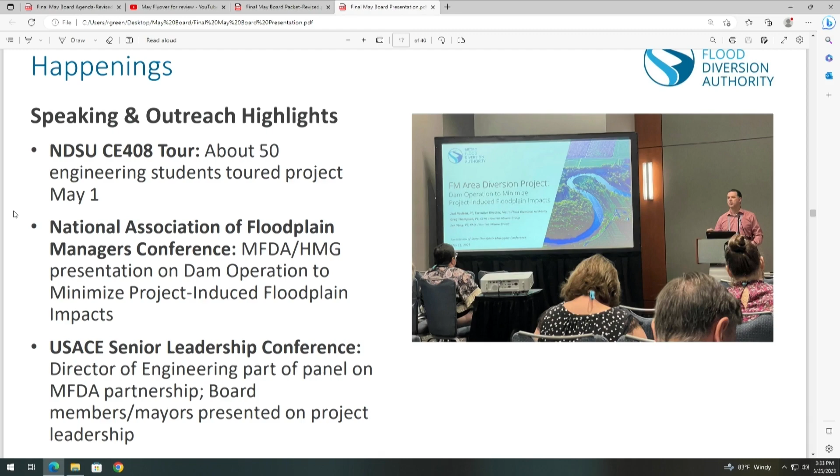Any questions? We know the Corps event went very well. They were very pleased with the project and seemed to hope other places in the country could work so well together. Yeah, and Mayor, I do know a number of other non-federal sponsors came and presented on certain aspects as well, and they got exposure to our project too. So it was great to see the exposure, and hopefully some best management practices from what we've done here can be conveyed to those programs as well.

Is that all you have today? That's all I have for you. Come on, Joel, it's usually 3 slides. That's all I have. We'll have more at the end, pertinent to more technical issues.

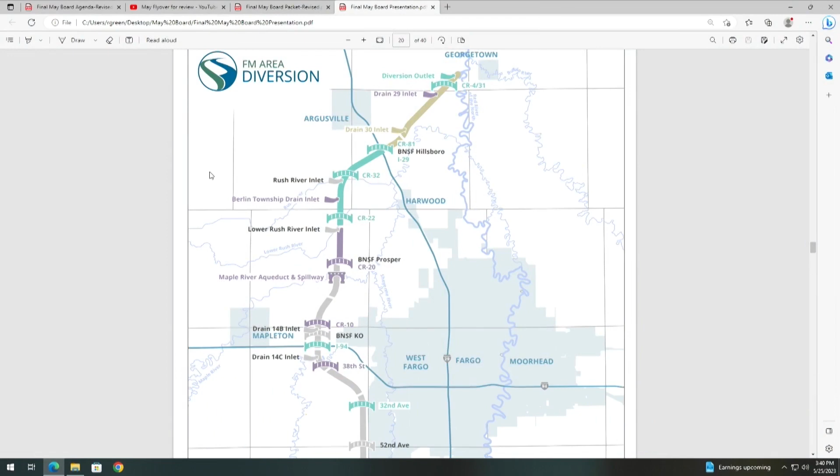We'll move into the stormwater diversion channel associated infrastructure project. We have our map this month, and I'll start with the design progress update. We've surpassed 1,200 review cycles for the P3 portions of the project. We have 77 approved designs, 58 utilities, 19 others, and 63 submittals currently in review.

As far as construction is concerned, channel Reach 3, just west of Interstate 29 up north, has resumed - that's pictured in our drone view. West from there and south, turning the corner, we've got Reach 4 and 5 starting in the next 30 and 60 days respectively.

Bridge crossings, highlighted in our video, both County Road 81 and 32 are just underway, with bypass construction at County Road 81 and preparation for surcharge embankments and wick drains at County Road 32. Just this week, not pictured in our video, the I-29 bypass has also started.

Drain inlets are just starting at Drain 30 as well. The diversion outlet and Drain 29 are kind of connected in terms of schedule sequence and logic - Drain 29 parallels the last mile or so of the channel. Those will be starting in the next 30 to 60 days.

Last item of note, Maple River Aqueduct, in the next 30 to 60 days will see actual construction of permanent features. Excavation will be the first thing they do there, but we are just starting to build access improvements to that site. It's a little remote - right north of West Fargo and west from there, there's about 2 miles of existing township roads, and the last mile is on the channel alignment to access that site. Those improvements are happening now as well.

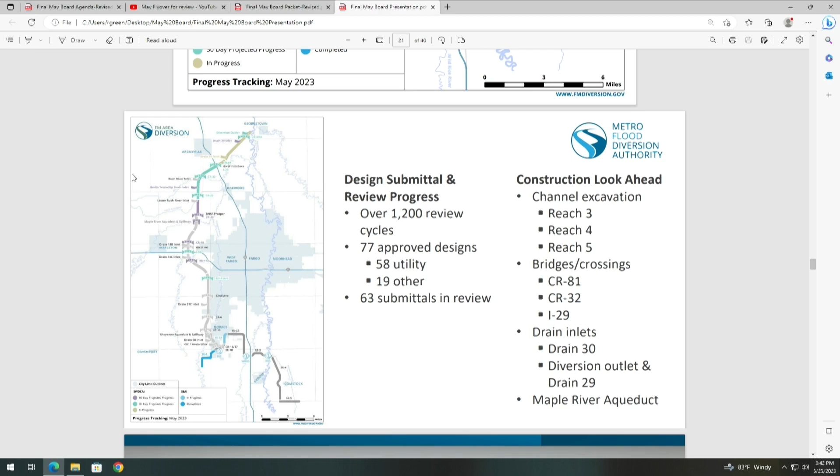I will stand for any questions on the P3 project. Any questions, group? Okay.

The pace of construction on the FM area diversion ramped up this past month. I'm Tom Fuchs, Senior Construction Manager for the Metro Flood Diversion Authority, with your progress updates.

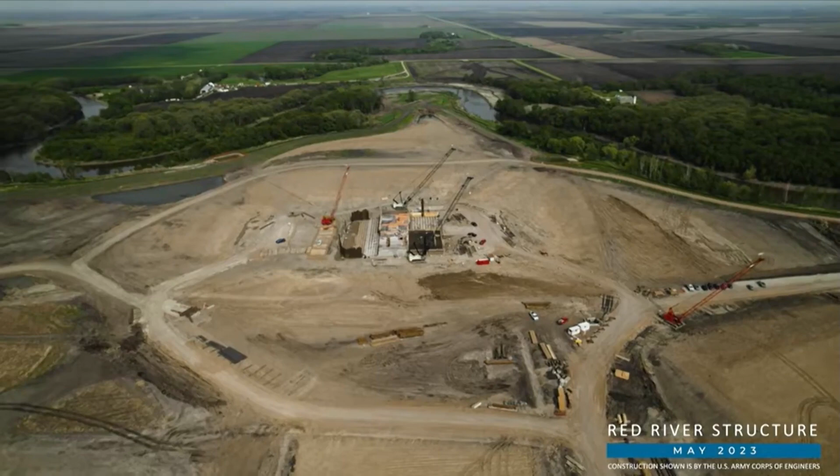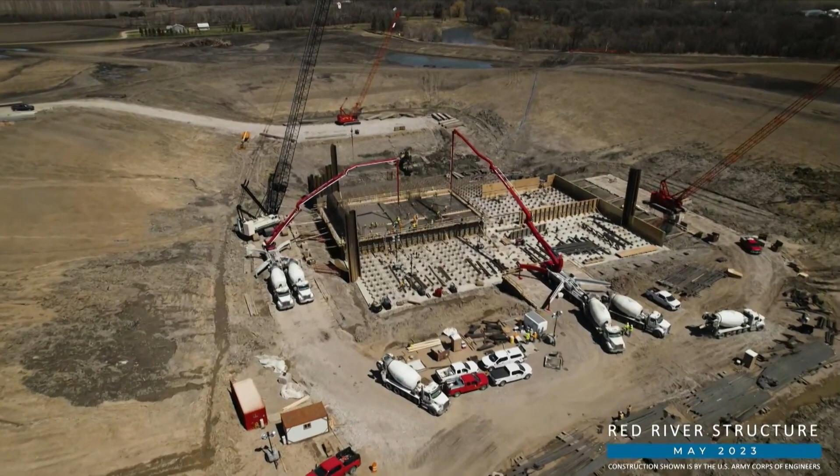Our drone view begins at the Red River structure, the largest of the 3 gated structures on the project. With driven H-pile foundations, stabilization slabs, formwork, and rebar completed in advance, Ames Construction poured the first of the structure's foundations on May 5th. Nearly 2,300 cubic yards of concrete went down in a single placement, enough for more than 10 miles of sidewalks. It was the first of many pours to come.

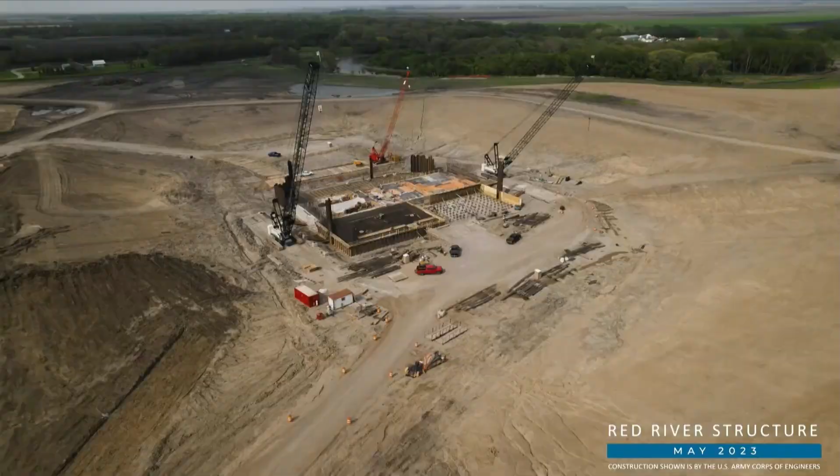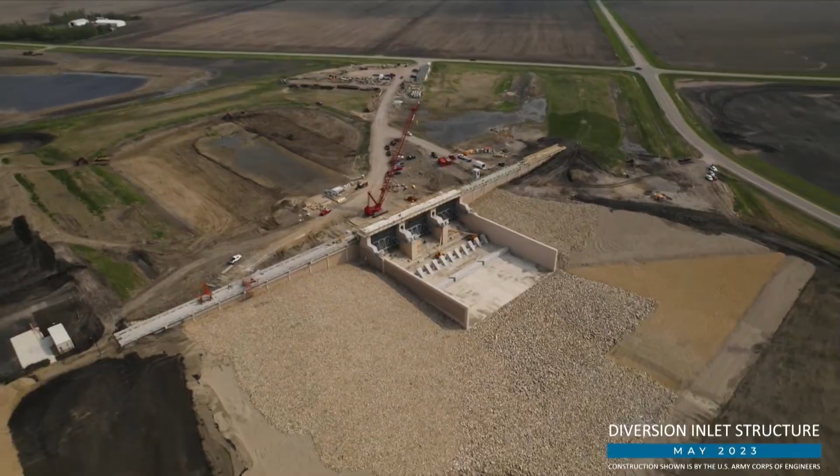Concrete was also poured at the diversion inlet structure, which is further along than the Red River structure. Crews have now completed the mechanical platform and vehicle service bridge decks, as well as multiple segments of the floodwall bridge railings, bringing it to 93% completion.

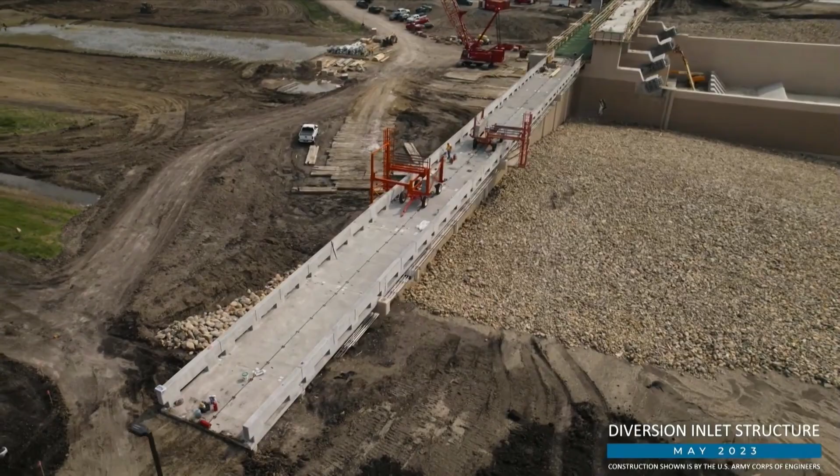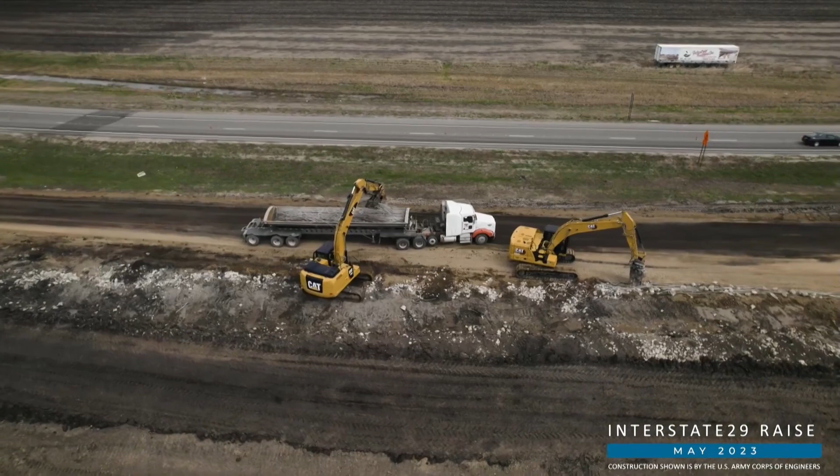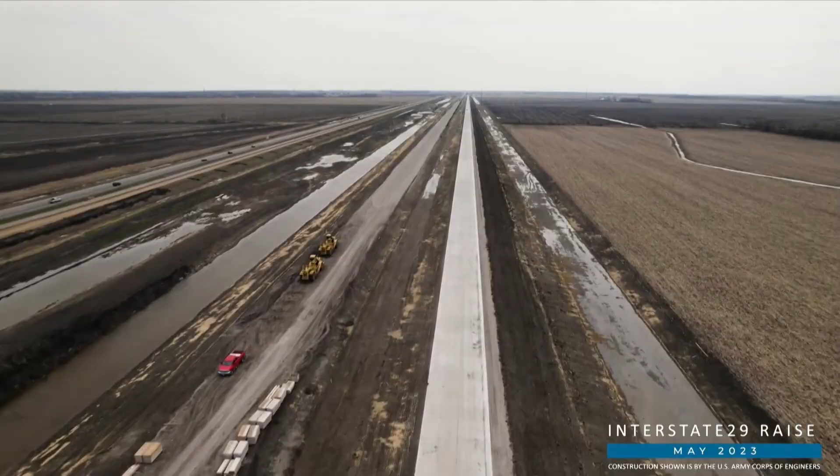Nearby on I-29, work continues for raising a 4.2-mile stretch of the interstate out of the 500-year floodplain. The project began in 2021, and drivers will be happy to hear work is anticipated to wrap up this year. Crews are focusing on permanently completing the new southbound lanes and have now begun removing portions of the bypass lanes. More concrete went down at this site too, as the northbound borrow ditch bridge deck was poured mid-month.

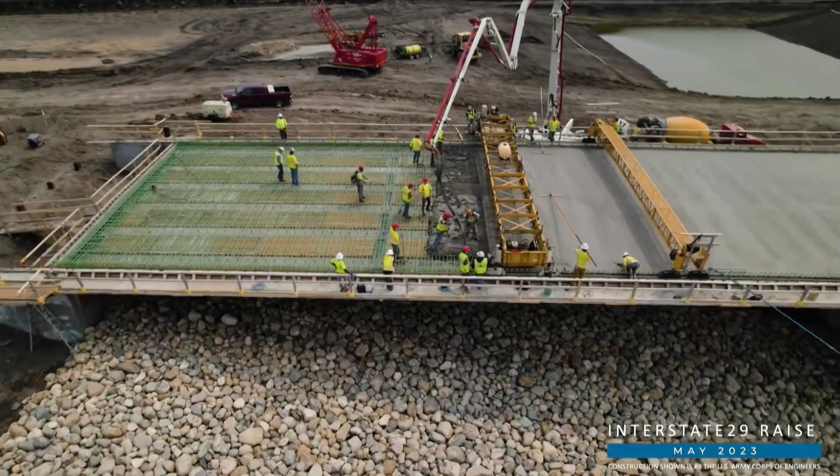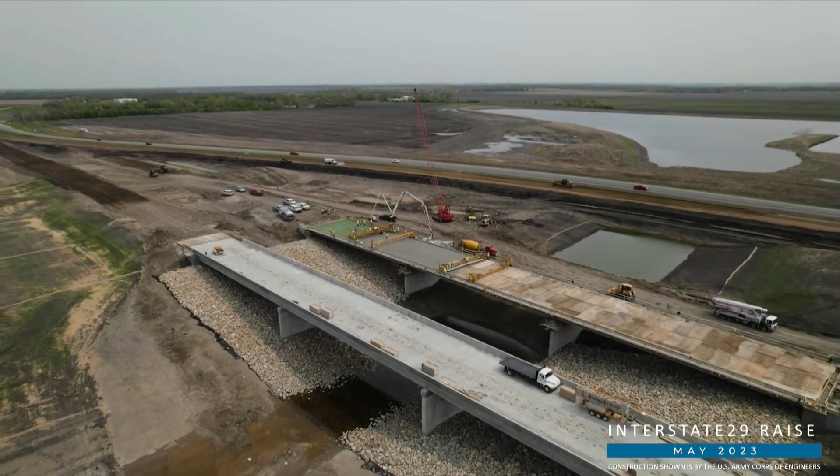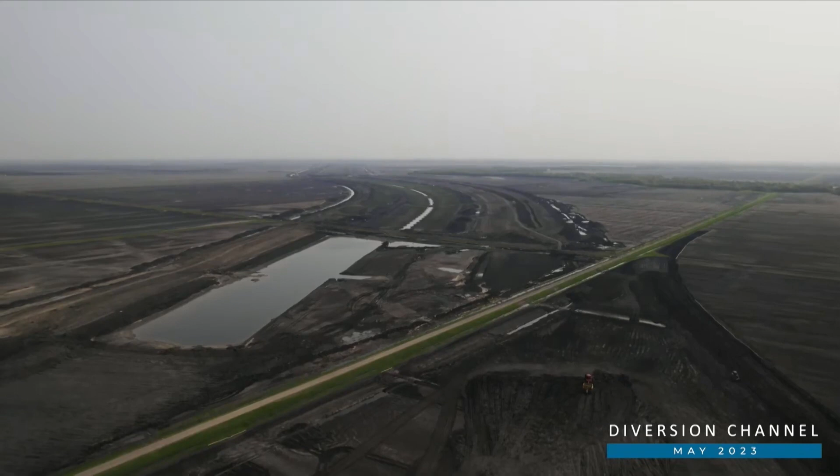Altogether, the project totals grew by about 5,400 cubic yards of concrete placed in the past few weeks - that's enough to fill 2 hot air balloons. While the weather has facilitated the concrete pours, it hasn't been as cooperative for excavating. The clay soil being dug out for the 30-mile stormwater diversion channel has been especially sticky due to the recent snowmelt and rain. Despite that, ASN Constructors is moving forward on the northernmost reaches of the channel.

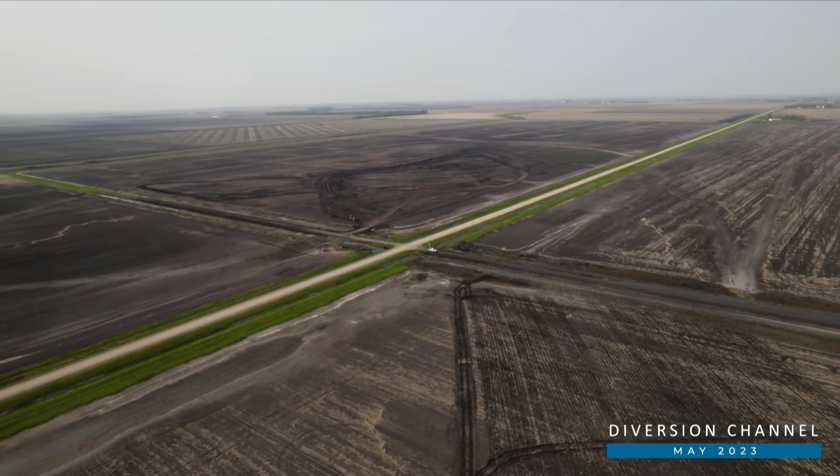They have also initiated new work on some of the channel's road crossings. At County Road 32, they are preparing to install wick drains and surcharge embankments, which will mitigate long-term settlement along the roadway approaches to the new bridge. They also began constructing the bypass at County Road 81. For road detour updates and project information, go to fmdiversion.gov.

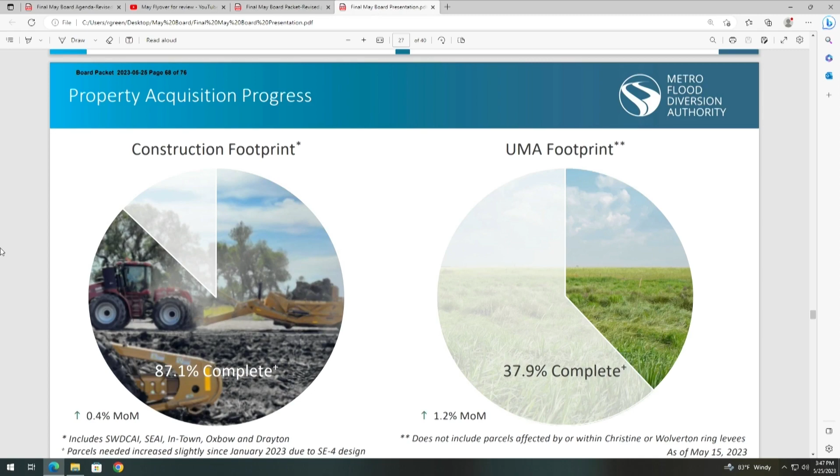Good afternoon. So we have our typical report here. If you scroll to the next slide, you'll see there's a slight increase in the number of parcels acquired for the construction footprint, and a slight increase of just over 1% for the UMA footprint. So we're up to just under 38%.

On the next slide, you can see additional progress moving forward on the southern embankment, upstream mitigation area. And of course, we always like to see that we're continuing to close on environmental monitoring easements.

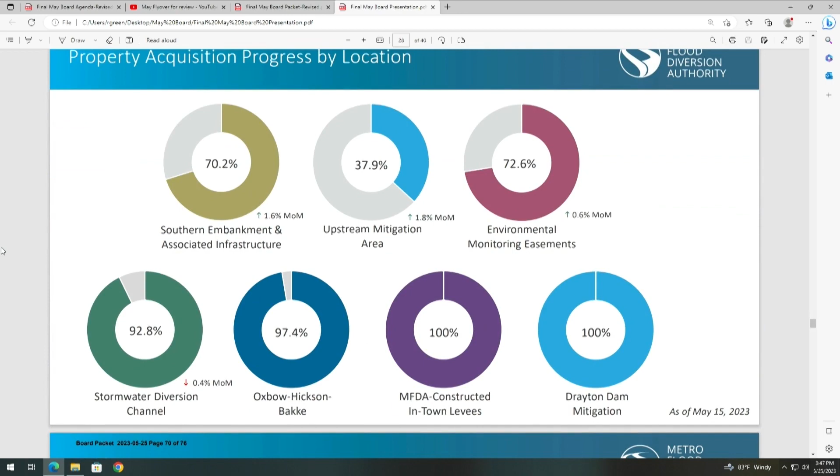On the final slide are just the key activities we've been working on, continuing to negotiate to settle all eminent domain cases. Batch 7 offer letters were sent out. The last written offer letters - the Cass County Joint Water Resource District has already approved one. The only other property owner in Batch 7 will have a settlement offer going to the board meeting on June 8th, so hopefully there won't be any eminent domain filings out of Batch 7.

We did work to reconfigure the future batch schedules for remaining properties. Everything should be in a batch and approved for eminent domain by the end of October 2023. We also initiated the right of entry process from property owners for the Sheyenne River Habitat Improvement Project, which Joel will be speaking more about at the end of this meeting.

In this last month, 5 parcels with 4 landowners have successfully closed, and 49 farm leases have been completed for the upcoming leasing season. I know we have about a half dozen more leases to secure here in the upcoming week. So open to any questions you might have.

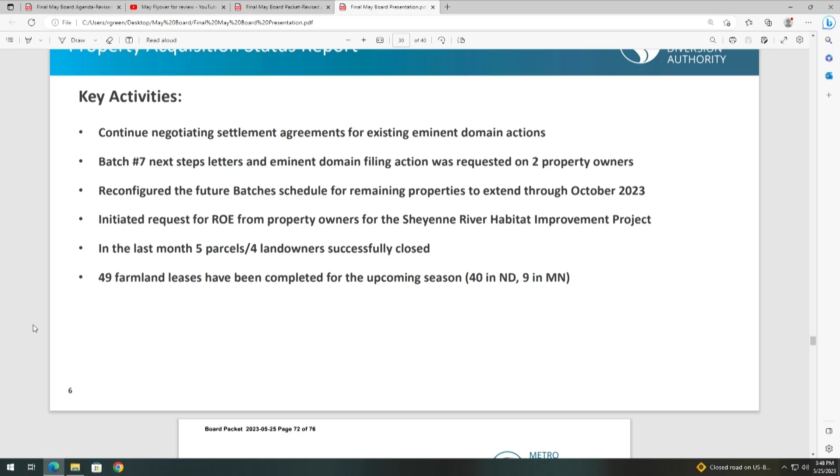Any questions from the group? Kind of a quiet group today, Kevin. What do you think? Thank you, Jody. Mayor Dardis, how are you today? Just fine, thank you, Mr. Chairman.

Are you in the mood to give us a report? Yes, sir. The Finance Committee met yesterday. Bills presented to the Diversion Authority were a total of $10,965,389. Our net cash position remains at $957,685. In addition to that, there were a number of items discussed regarding utility relocations and all of those types of things, all of which met favor with the Finance Committee.

All were approved. You'll see also the City of Fargo work plan for projects bid in 2023. We had an amendment for that, and I don't know if somebody else wants to go into all the details. Mr. Fook? All right, I'll defer to him. Thank you, Mayor Dardis. That's correct.

So we are making a motion today to approve the 2023 development plan summary sheets and the estimated total project costs for the NR 23A1 City of Fargo Local Flood Protection Project. It's a 6% total budget increase resulting from bids open 4/26, about 8% above the engineer's estimate, with corresponding adjustments made to project contingencies and construction service budgets related to that project, which are consistent with prior projects and circumstances. I will stand for any questions.

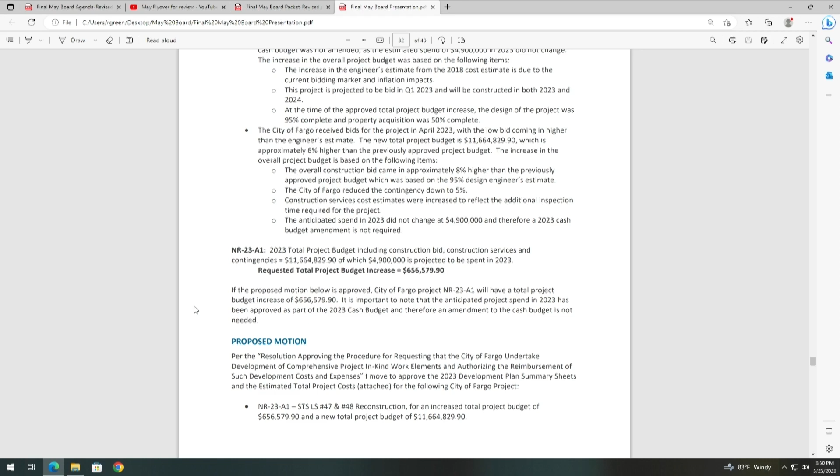The difference is $656,579.90 for a new project budget total of $11,664,829.90. Is there a motion?

So moved. Is there a second? Second. Any discussion or questions?

Roll call vote, please. Mayor Mahoney, aye. Mayor Dardis, yes. Mayor Carlson, yes. Mr. Hendrickson, yes. Mr. Piepkorn, aye. Mr. Ebinger, yes. Mr. Strand, yes. Mr. Campbell, yes. Mrs. Scherling, yes. Mr. Grimberg, aye. Mr. Selchwold, aye. That is everyone. That completes your report.

Thank you. Other business, Sheyenne Habitat Mitigation Project, Joel.

Well, thank you, Mr. Chair. As the board's aware, we have been dealing with fish passage on the aqueduct structures for quite some time. This issue goes back over a decade.

Our environmental commitments are to maintain fish passage across the aqueduct structures for the Sheyenne and the Maple River aqueducts. We have finally found resolution with this issue with the state agencies and the Corps of Engineers, and we found a permittable solution. I'll get into some technical detail, but feel free to ask any questions if you want additional clarification.

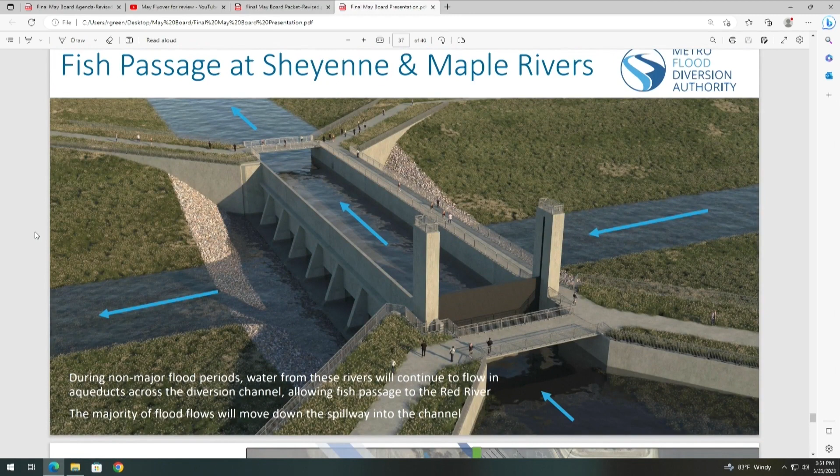Here's a rendering of the aqueduct structure, and the rivers will go over the stormwater diversion channel. The next slide shows the proposed design from RRVA—this is what they're expecting to construct at the Sheyenne River as it crosses the stormwater diversion channel.

I'll just note a couple features here. The river is flowing from the bottom of this slide to the top, and you can see the aqueduct structure indicated there. We have the spillway just adjacent to the aqueduct structure, and that spillway will spill the flood flows, or any flows greater than what can be crossed through the aqueduct structure. So in essence, the aqueduct structure is a flood control element, because no more water will be able to get through the Sheyenne River system than what we allow through the aqueduct system.

The problem comes with fish passage during flood events, when we start to drop a majority of water through that spillway into the stormwater diversion channel. It creates an upstream drawdown that increases the velocities above normal river velocities, such that fish are not able to migrate during flood events.

So our engineers, along with HMG, came up with some concepts to install rock rapids and riffles upstream of the Sheyenne aqueduct structure, as well as some channel and habitat improvements for about a 2-mile stretch upstream on the Sheyenne River. This will stabilize the river system within those 2 miles. It also reduces those velocities back to near existing conditions, which allows us to have acceptable fish passage with North Dakota Game and Fish and the Minnesota DNR.

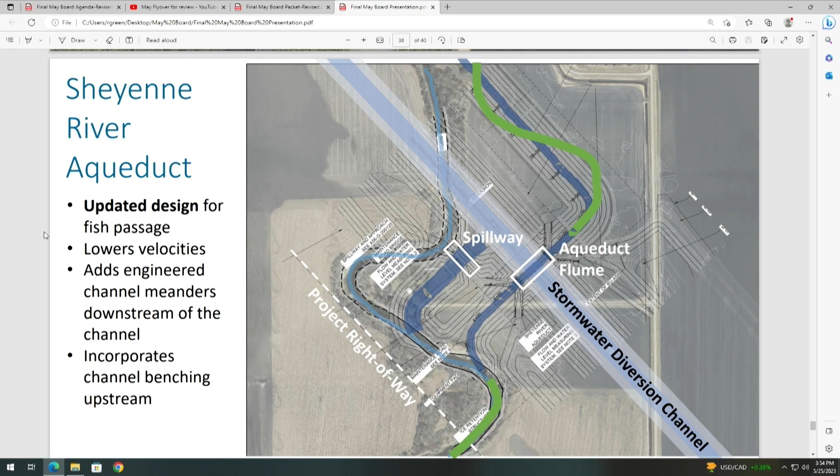On the next slide, you can see the impacted parcels. These are new impacted parcels along the Sheyenne River system. The impacts to these parcels will be fairly minimal as far as an acreage standpoint. Most of the work on the river will take place along the banks of the river and at or near the ordinary high water level.

We do anticipate some level of vegetation loss through this reinforcement as we widen parts of the Sheyenne River and create more flow area to slow those velocities down. We've already had a public landowner meeting with the landowners that may be affected by this project. We received a lot of questions from them, obviously some clarification of why we're doing this now and why this came up. It really wasn't until we received the developer's design a few months ago that we were able to put detailed modeling into place and come up with this proposed solution.

So we will continue to work with these landowners to find acceptable solutions and impacts to their parcels. But this will be a project that is necessary to meet our NEPA requirements and our permitting requirements through the Corps of Engineers. So it's kind of bittersweet. We are anticipating the total cost of this somewhere around $15 million, which we did allow for with a $20 million contingency for this issue in the P3 budget. So the anticipated costs of this project fall well within our anticipated costs for this issue.

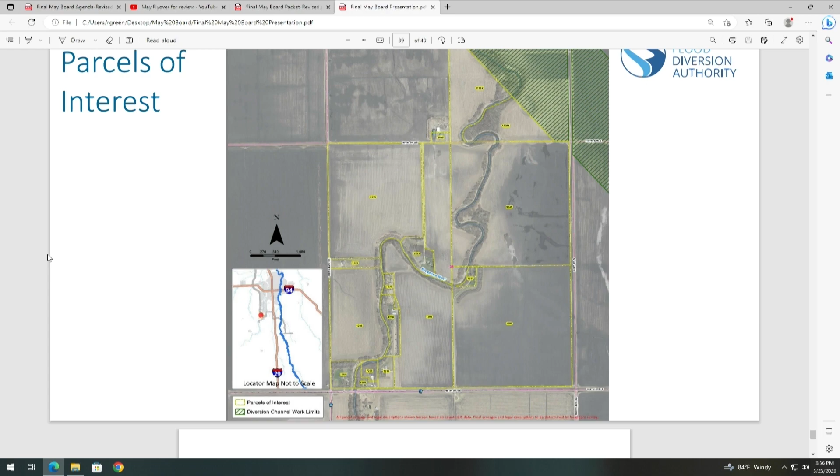Kevin wants to know where the fish would be mostly when he wants to go out fishing, since he has a hard time catching walleye in Minnesota. Because these aqueduct structures are heated, I'd anticipate fish being near the aqueduct structures, and we could create a small fishing pier there for Commissioner Campbell if he'd like. It's a recreational feature. I'll outfish him any day.

No action needed on this item, just for information. This part of the program will be referred to as the Sheyenne Habitat Mitigation Project.

Minnesota legislative update. I'll ask Mayor Carlson, since she has bragging rights on this. Thank you, Chair Mahoney. For the Minnesota legislative update, as everyone probably knows, the legislature ended this past weekend.

Out of our request for flood mitigation on the Minnesota side, we were able to obtain $11 million, which will go towards three projects within the city of Moorhead. We always get trapped by trains over there, and we always have something on trains too.

We got additional money for an underpass, not overpass, correct. Good. Joel, do you want to compliment that, or was it the hard work of the team, or did our Minnesota team do well?

I think the city of Moorhead and their staff did an exceptional job lobbying for the flood control money. We worked with the MCC-JPA to make an additional request for county dollars to meet the Minnesota obligation in the JPA. Unfortunately, there was only $40 million allocated to flood control across the whole state of Minnesota, so it was maybe a little frustrating. We didn't see more there given their massive surplus last year. But I believe we'll continue to work with MCC-JPA to make additional requests in the future for flood mitigation dollars for the program.

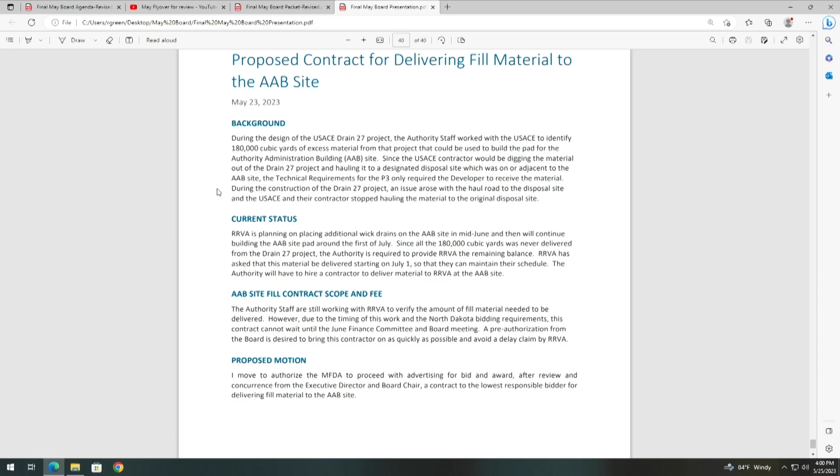Any questions with Joe on this particular item? Otherwise, I'd entertain a motion. Move for approval. Is there a second? Second. Moved and seconded. Any other discussion?

Roll call vote please. Mayor Mahoney, Aye. Mayor Dardis, Yes. Mayor Carlson, Yes. Mr. Hendrickson, Yes. Mr. Piepkorn, Aye. Mr. Ebinger, Aye. Mr. Strand, Yes. Mr. Campbell, Yes. Mrs. Scherling. Mr. Grindberg, Aye. Mr. Selzwald, Aye. That is everyone.

Thank you, Mary, we got it. Scherling, yes, as well. Next meeting, June 22nd, 2023.

Commissioner Strand, you got any birthdays? Anybody here on this board that has anything we need to celebrate? I won't embarrass Martin. Okay, thank you.